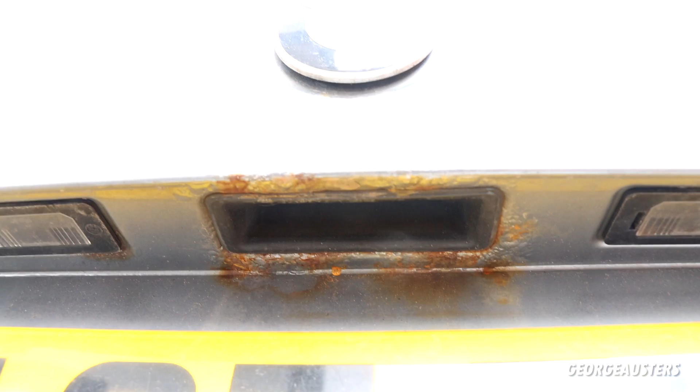But one thing I didn't point out was the tailgate. I didn't actually even notice, but if you look underneath here, can you see that rust there? Yeah, that is not ideal. And also notice this, I just thought it was dirt originally, but that is actually paint that has flaked off. There's also a pretty nasty gash in the tailgate that's gone right through the paint. There's a little bit there, but I think most of this can be polished out. The worst of it is definitely in the tailgate.

So for sure, the tailgate is going to need replacing. Of course, you could repair it, but it's really not worth it for the price of a tailgate, which I'm gonna guess is £100 or less. It's gonna cost a hell of a lot more to try and repair the tailgate than that.

Now, the rest of the body panels, aside from the side skirt, which I think I'm just gonna go ahead and replace - I think this is silver grey, so as long as I can find a silver grey passenger side skirt, I'll replace that. But the other body panels I'm going to try and leave as they are. I have actually ordered a polisher, a dual action polisher, a pretty decent one, so hopefully we can get the bodywork looking nice.

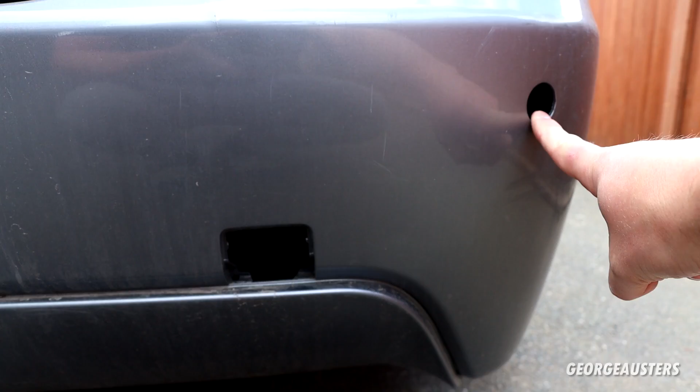I know there are a few pieces missing here and there. We have this cap that's missing, and then the parking sensors - I really don't know what the deal is with those. Are they completely removed, or have they fallen down into the bumper? I don't know. I think probably what I'll do in the next video is remove the bumpers and side skirts, replace what I want to replace, and then do some investigating, because I know for sure this bumper has been off before, because there's a bit of a gap there.

And the front bumper, I think that's been off before as well, because this gap does not look ideal. Now, I'm not saying it's had any damage on the front or the rear - we'll obviously see once we remove the bumpers - but maybe someone's removed it just to replace something in the past, and they haven't put it back quite right. So we will do some investigating with that. Already mentioned with the headlights, they are very clouded, and the polisher should come in nicely when it comes to cleaning those up. But the rest of the bodywork is pretty much sound.

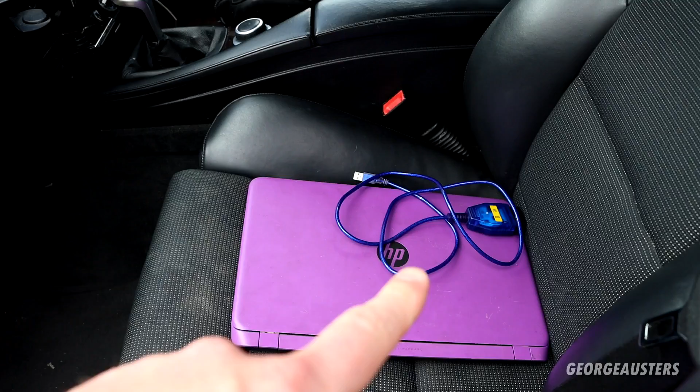Now, I think the thing you're probably most interested in seeing is just how many and which fault codes this car has. So we do have the laptop, we do have the DCAN cable. Let's get ISTA loaded up and let's see what this car is telling us.

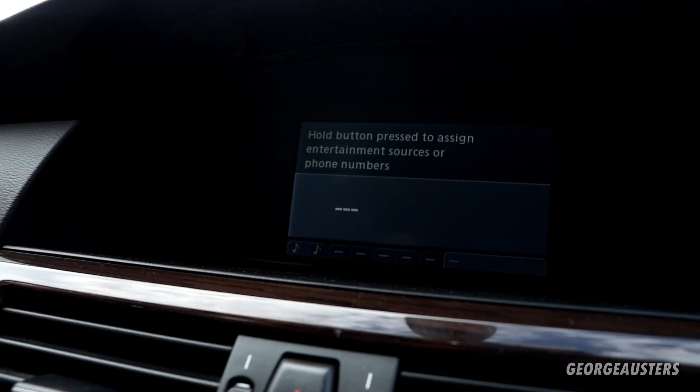Okay, while we let ISTA load up, I thought I'd let you guys know a couple of things I've discovered. So the iDrive, with this being Mark 2 with the smaller screen, I've noticed it seems to get stuck on this screen right here: 'Hold button pressed to assign entertainment sources or phone numbers.' Now, I have no idea why that is displayed. The only thing I can think of is one of these buttons down here - maybe one is stuck. It would indicate it's number 8 that's stuck, if anything, or maybe something is on it, some cleaning product, or maybe the button itself is just faulty. I don't know, but these are touch sensitive, so if you just glide your finger along, it should select or at least highlight the button you want pressed.

Although, yeah, I don't think these are working properly as is. But possibly this could just need a bit of a clean. I'm not too sure yet, but that's obviously not a major issue at this stage.

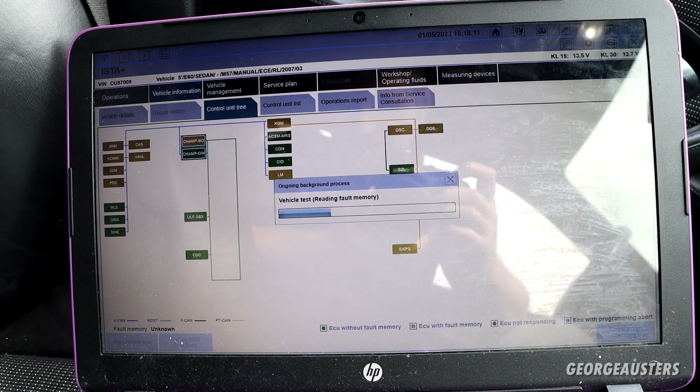Now ISTA is loading up, and this will reveal just how many fault codes we have stored on the vehicle, and it's already not looking too good, is it? Okay then, so we can see 22 fault codes in the fault memory. These are the modules that are displayed.

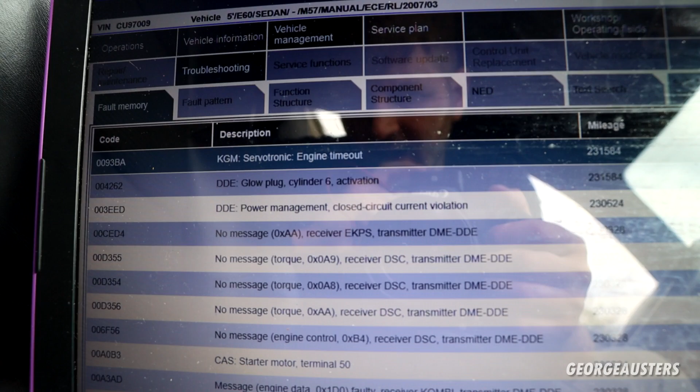Let's click display fault memory. And right, here we go then. KGM Servotronic engine timeout - I'm not too sure what that is, if I'm being completely honest. We have a glow plug error. These are non-existent, by the way. Actually, pretty much all of these are non-existent.

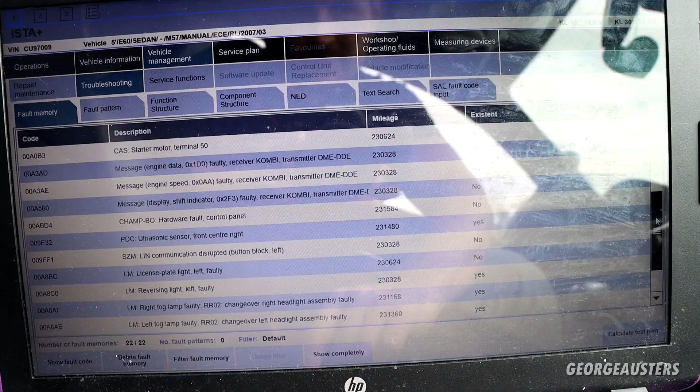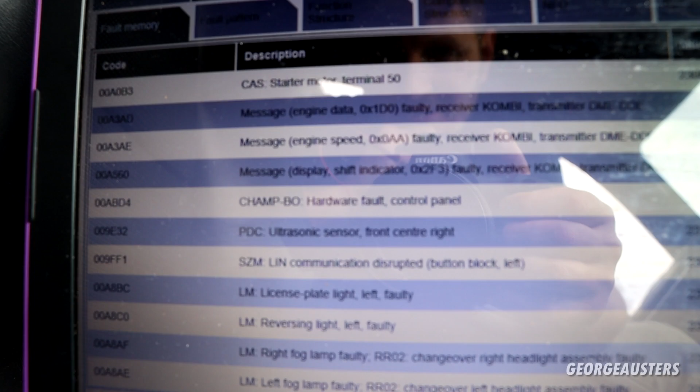Let's see if there is any that are even existent. Let's focus on the ones that are existent first, because that's going to be the most relevant. So the first one that is existent is the parking distance control front center right parking sensor, which is interesting because that one is in place, so maybe that could just do with a clean.

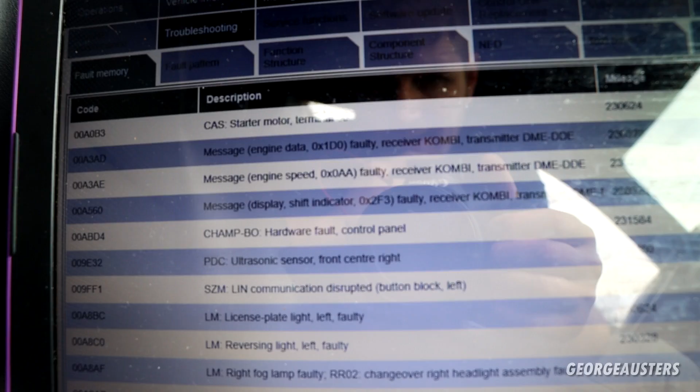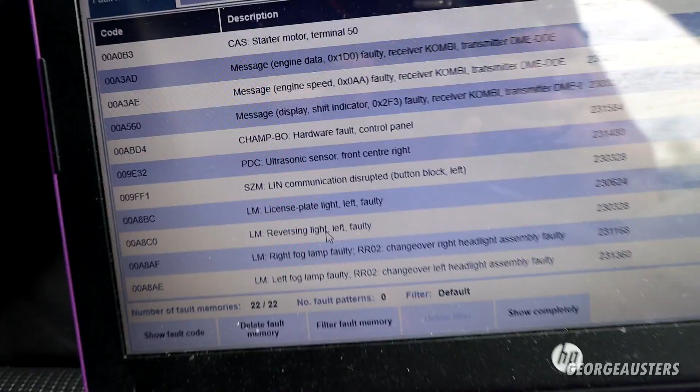We have reversing light left faulty. We also have a license plate light left faulty.

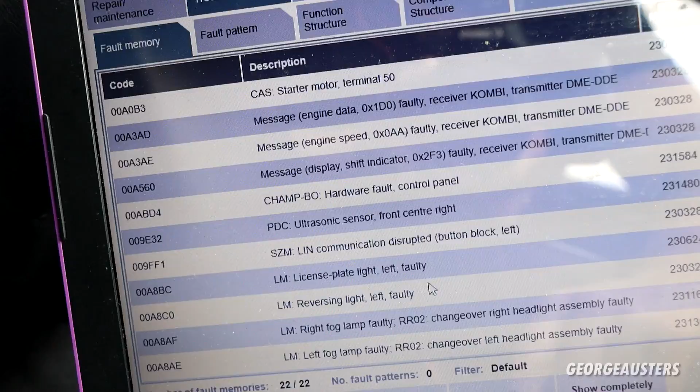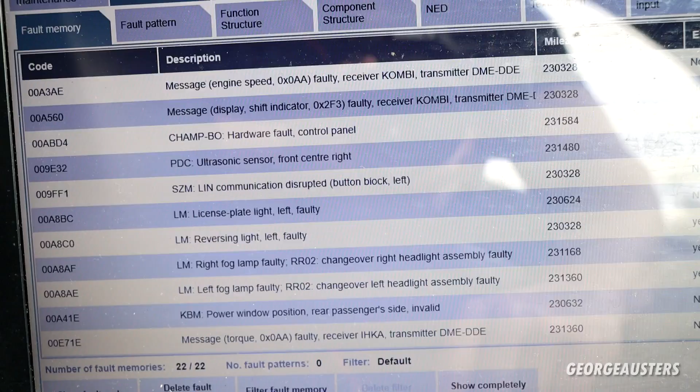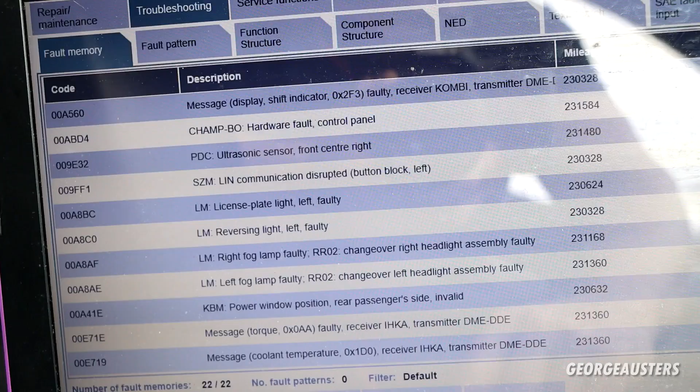Now, we seem to have a lot of error codes for bulbs. I don't think the bulbs are actually blown. I think it's just going to be a case of them not being CAN bus bulbs. So when you are swapping out bulbs, you need to make sure they're either OEM bulbs, or they have a resistor in, so it doesn't throw up a fault code. So yeah, I think we're probably going to have to replace quite a few bulbs here.

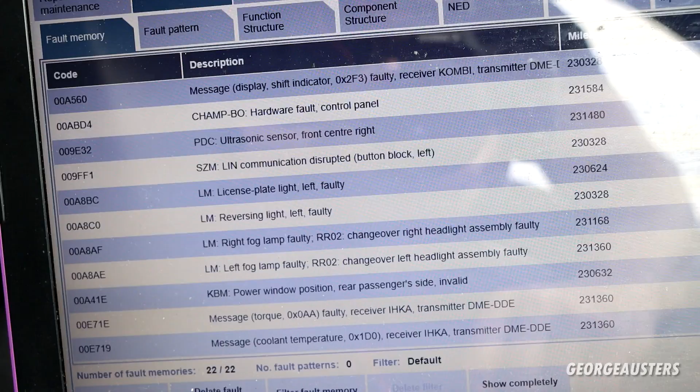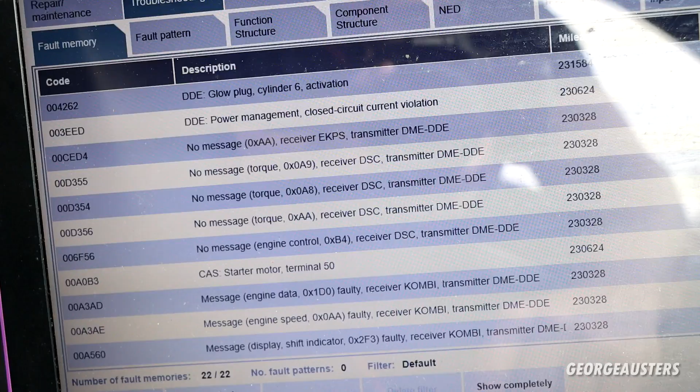But all in all, I can't really see too many concerning fault codes here. And we do have a couple in the DDE, like I mentioned, the glow plug one. That could just be a historic one. I'm pretty sure this has had glow plugs and a glow plug module in the past 2 or 3 years or so. There's power management closed circuit current violation - no idea what that means.

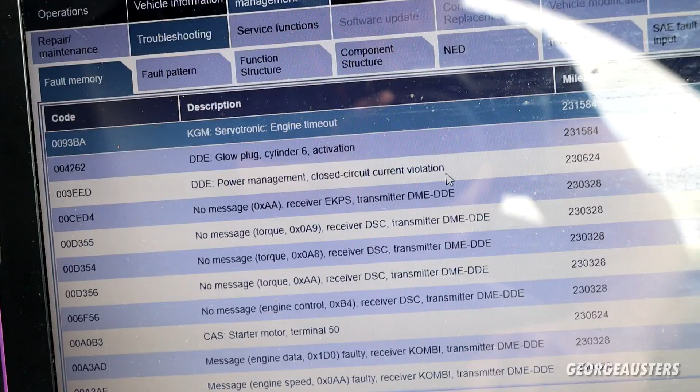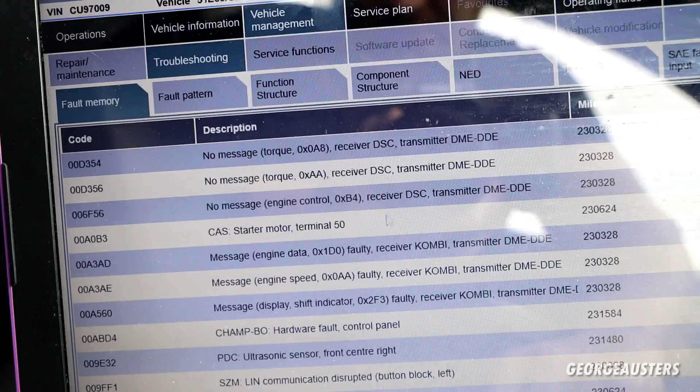We have one from the starter motor there. So could that be something that has caused the car not to start in the past? Possibly. Okay, I guess what we need to do realistically is delete all of these fault codes and then start the engine up and then go from there.

So yeah, we'll just delete fault memory. And once these have cleared, like I said, we'll start the engine up and perform another test.

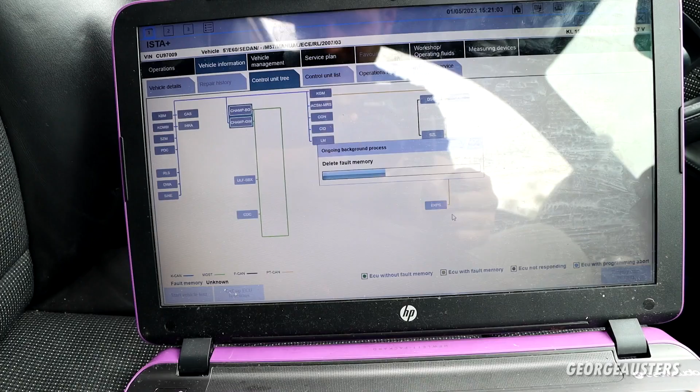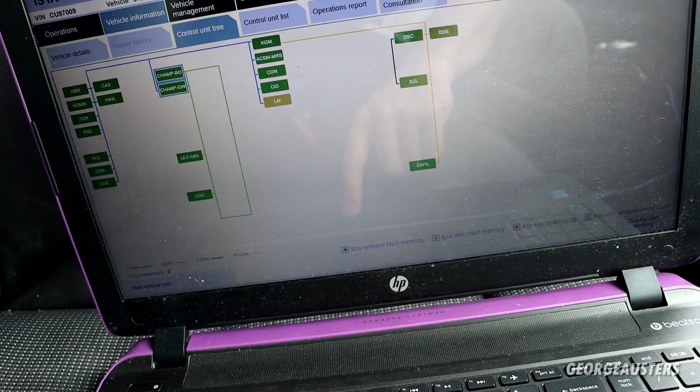Okay, so after clearing the fault codes, straight away we have some come back in the light module. I'm guessing these are just going to be bulbs once again. Yeah, reversing lamp faulty and fog lights faulty. So not concerned with those, but we will just go ahead and fire the engine up.

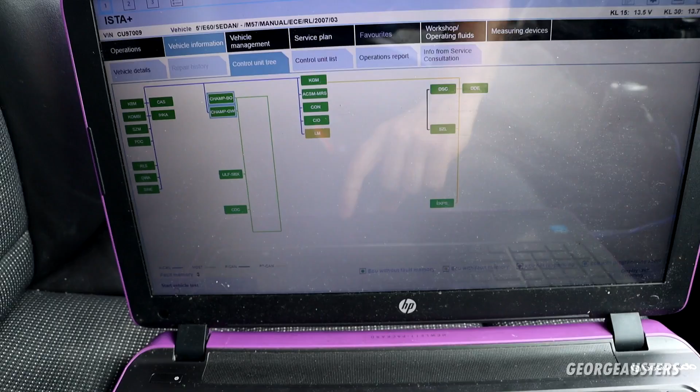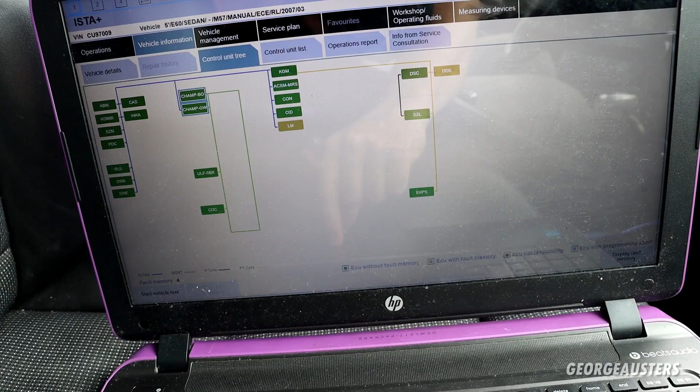And now we'll go ahead and do another vehicle test. Interesting, so we now have 4 faults and one has come back from the DDE, which is the one we are most looking forward to checking out.

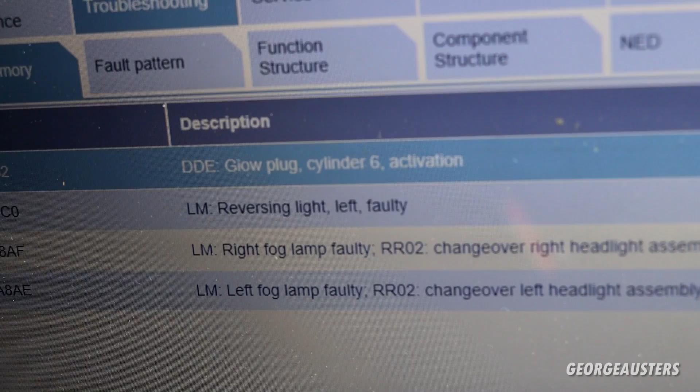That's very interesting - glow plug cylinder 6 activation. So either this needs new glow plugs, which like I said I'm pretty sure this has had in the past 2 or 3 years or so, looking back at the receipts, or we have a wiring issue, or it could just be a bad contact. So I'm going to have to do some investigating with cylinder number 6.

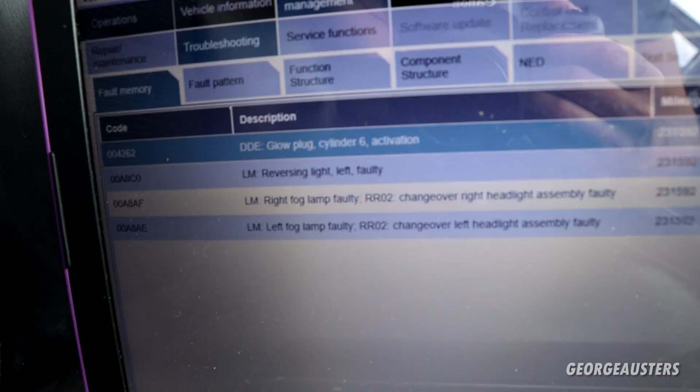Let's check though the bulbs that are displaying as faulty. Let's see if the bulbs are actually blown. So got the lights on, got it in reverse, got the fog lights on as well.

And as you can see, the fog lights are in fact on, but these are definitely aftermarket, and I can see these are LEDs and they must not be canbus ones, so we're going to have to swap these out at some point to stop those error codes. Let's go around to the back.

Is it going to be the same situation here? So that one's working, okay. That one's not. So I would guess that we do have a blown bulb in there, which again, that's not a difficult fix, so we'll get onto that at some point.

Only one of the many bulbs that said they were blown is actually blown. There was a fault code for the number plate lights as well, wasn't there? But they seem to be good, so we're fine for those. The tailgate is going to need replacing anyway, so we'll probably swap those over to the new tailgate.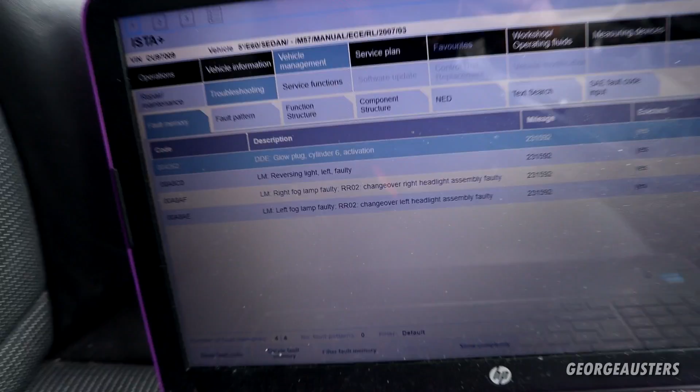Now, of course, after getting back into the car, we are greeted with PDC failure. So yeah, that is something we're going to have to sort at some point. I don't know why it hasn't displayed in the fault memory. Maybe it's only just triggered it.

But yeah, of course, we have the two on the rear that are completely missing. Whether or not they've fallen inside the bumper, I don't know. And then it was displaying a faulty one on the front as well. So yeah, we'll look at getting those sorted at the same time.

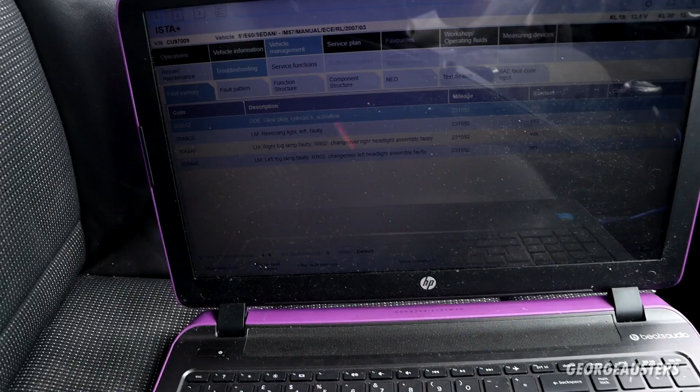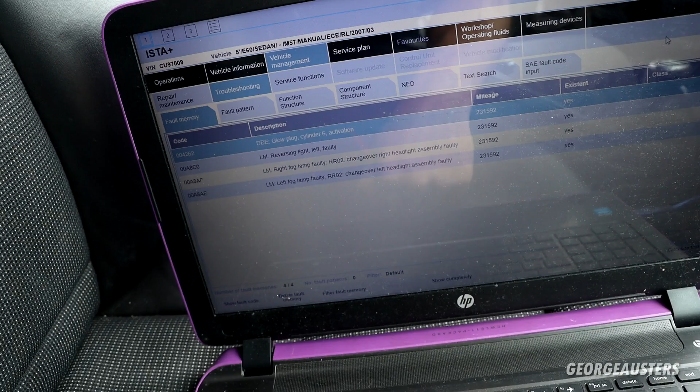But yeah, on the whole, pretty pleased with that diagnostic scan. Nothing too out of the ordinary. Like I said, we do have some situation with the glow plug in cylinder number 6, whether or not maybe that one was left because it was in fact snapped. I really don't know. We're going to have to do some investigating with that. But then, yeah, the rest are just bulbs, which is definitely a nice, quick and easy fix.

Okay then, so in summary, have I bought a bad car? For £650? I really don't think so. Pretty pleased with the outcome of those error codes, should be some nice easy fixes in there. All the cosmetic stuff I do plan on sorting, as I mentioned, the tailgate, the side skirt. I'll try and replace that if I can, and then just some touching up here and there, but the overall condition of the car is pretty decent.

One thing I'm not too sure about is the interior, and I'm looking for your guys' input. Should I leave the interior alone, just keep it as the half leather, half cloth, or do I swap out the entire interior for a full black leather interior? Obviously I'd have to do the door cards as well, and the rear seats of course, but yeah, I'm looking for your input on this. Do I just leave it alone and not give myself more work, or do I get that interior upgraded? Let me know in the comment section below.

Well, there we go then. That is pretty much everything wrong with the cheapest BMW 5 Series in the country.

Now, like I said, I'm looking for your guys' input as to which direction I should go down with this car and what I should be replacing, what I should leave, because if any of you guys know me, you'll know that I try to get every car running, driving and looking absolute perfect. But with the goal in mind of trying to make a profit, so we can take any profit we have and take that into the next car, we need to be sensible about things. We need to not really replace things that don't really need replacing.